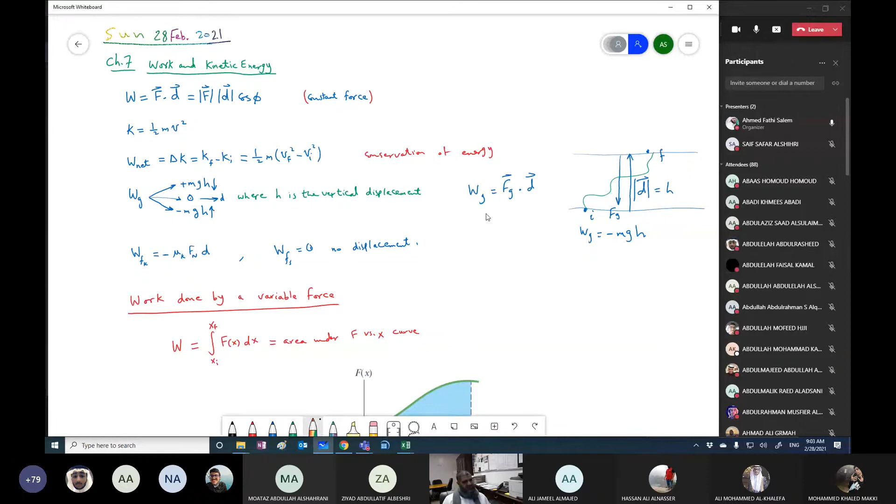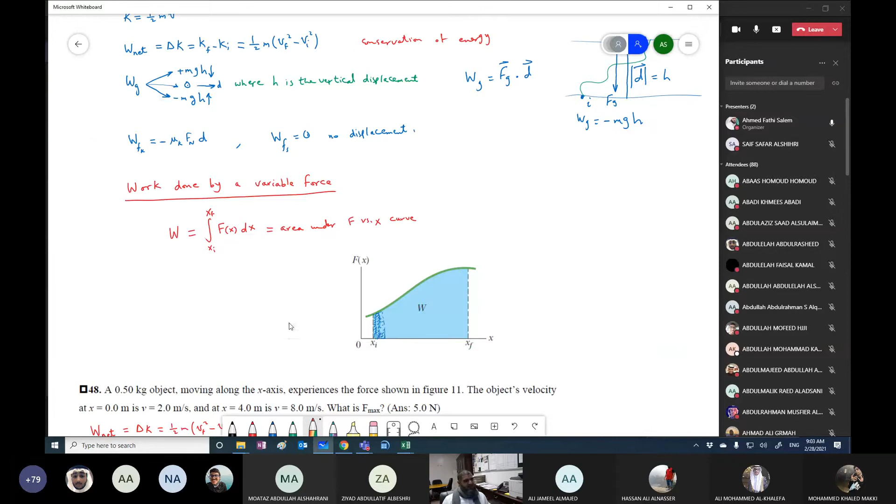Also, we started talking about the work done by a variable force. If the force is not constant, the force is changing, and we said that would be the integral from x initial to x final of f of x dx, and graphically this is equal to the area under the force versus x curve. We solved this example and we started discussing the work done by the spring force, and we said the spring force is not constant, but rather it varies, and it is given by Hooke's law, where Fs equals minus kx.

طبعا this minus sign makes trouble for many students, please be careful. This minus sign means that this force and this displacement are in opposite directions. So if the force, notice here, in this example, you are pulling the block to the right, so the displacement is to the right. The force of the spring will be to the left. The spring is pulling the block to the left.

Okay, now if you are pushing the block and compress it, the displacement will be leftward, and the spring will be pushing your object, so displacement will be to the left, force will be to the right. Up here, displacement is to the right, force of the spring will be to the left. خلاف يعني، هذا المعنى. واحد يمين هتلاقي التاني شمال. طب اللي كان يمين ده صار شمال، الفورس صارت ايش؟ صارت يمين. This is the meaning of the minus sign.

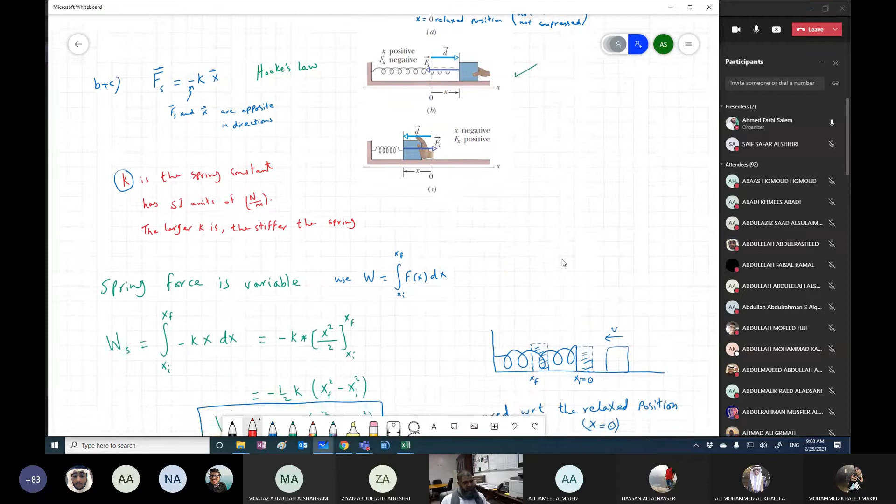This was a simple introduction about the force of the spring. But our goal is to know what is the work done by the spring force. Of course, the spring force is not fixed - it depends on how much you compress the spring. If the spring is not compressed, the force will be 0. If you extend it 1 centimeter, it will exert a force; 2 centimeters, more force; 3 centimeters, even more, and so on. So it is not a fixed or constant force - the spring force is variable.

So we will use the formula: work equals the integral from x initial to x final of F of x dx. The work done by the spring is the integral from x initial to x final of minus kx dx. This minus kx is Fs, the force of the spring. If you integrate, minus k comes out, and you integrate x, which gives x squared over 2, evaluated from x initial to x final. So this becomes 1/2 times minus k times x final squared minus x initial squared. We take the minus sign and put it inside the parentheses, and you get: work done by the spring equals 1/2 k times x initial squared minus x final squared.

Clear, the derivation? So x here, whether x initial or x final for the spring, is measured with respect to the relaxed position. The relaxed position of our spring is x equals 0. So this is our spring, and it is relaxed here - say this is relaxed. What do we mean by relaxed? It means equilibrium, meaning it is not compressed nor stretched - this is the natural length of the spring. If you press it a little more, this becomes some x; press more, it becomes a larger x.

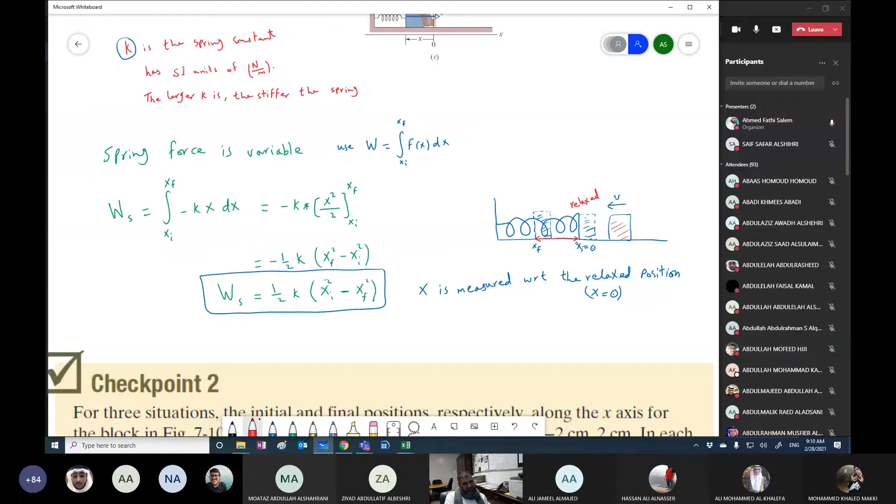Guys, keep this in mind like an earring in your ear: if the spring is relaxed, it means its x is equal to 0. Then finally, when the velocity of the object is 0, we will have x final. How much is x final? It is this distance from the relaxed position. So we measure x final with respect to the relaxed position.

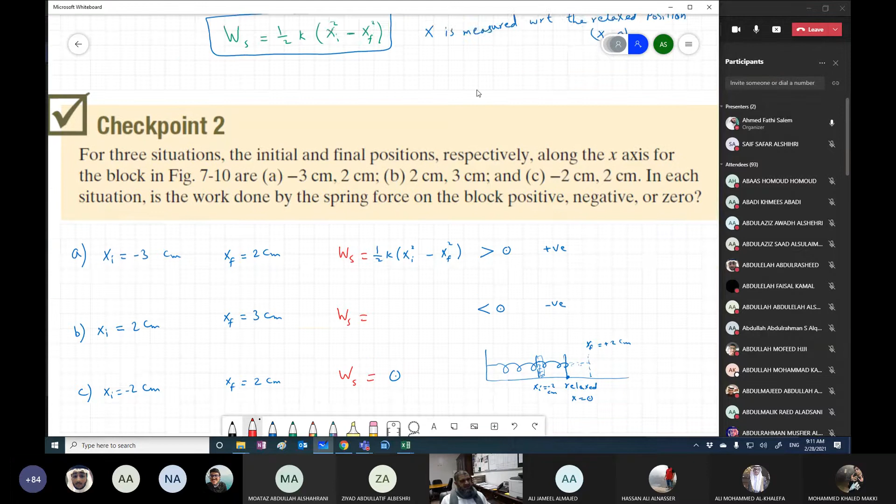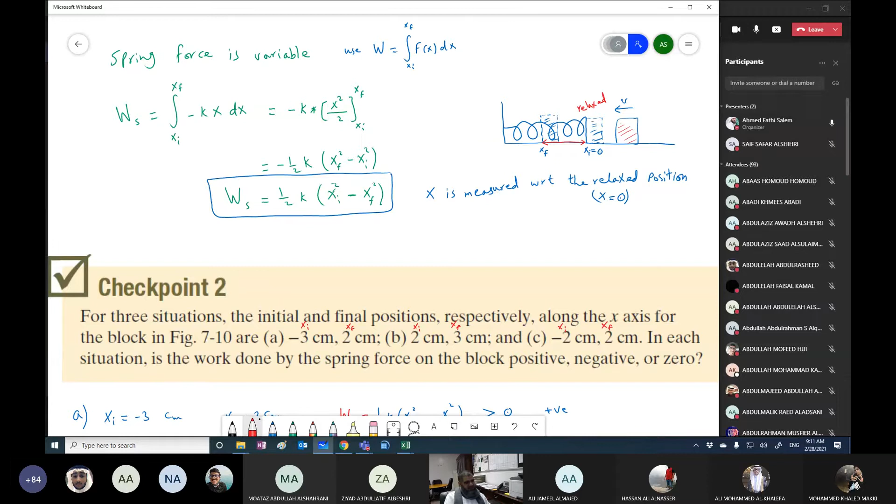Let's take a checkpoint question. For 3 situations, the initial and final positions respectively along the x-axis for the block in this figure that you're seeing are -3 and 2 centimeters - -3 is x initial, 2 is x final; this is x initial, x final; x initial, x final for each case. In each situation, is the work done by the spring force on the block positive, negative, or zero?

In the first case, x initial is -3, x final is 2. Work done by the spring is 1/2 k times x initial squared minus x final squared. This will be squared, giving positive, and this squared too, but we get 9 minus 4, which is greater than 0. That means the work done by the spring will be positive.

In the second case, initial is 2 centimeters, final is 3 centimeters. So work done by the spring will be 1/2 k times x initial squared minus x final squared, which is 2 squared minus 3 squared, so this will be negative work.

In the last case, you start with x equal -2 centimeters to x final 2 centimeters. So x initial is -2, x final is 2. When you square, this minus becomes positive, and this is also positive.

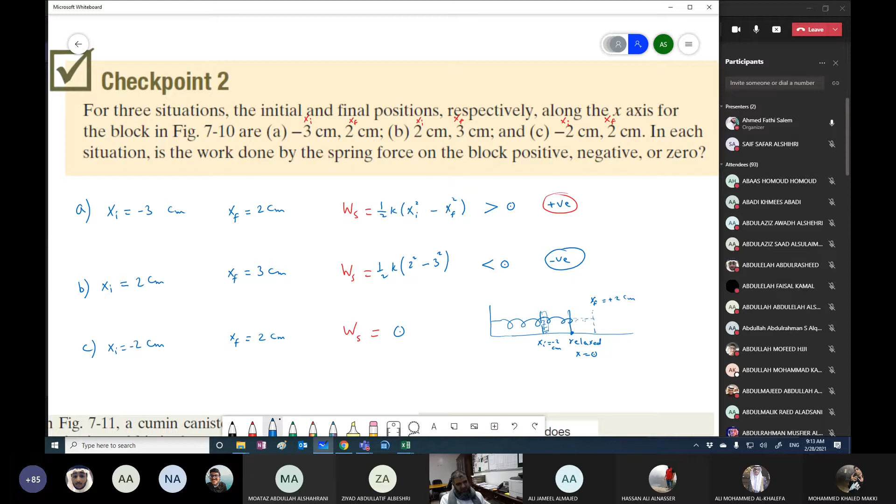So x initial squared minus x final squared will give you the work done by the spring equal to zero. How do we recognize this? This is the relaxed position, x equals 0. Initially it was compressed at x = -2 centimeters to the left of the relaxed position. Finally it is extended or stretched 2 centimeters to the right of the relaxed position. This is the meaning of x initial = -2 and x final = +2. Of course the relaxed position is somewhere in the middle between the two points.

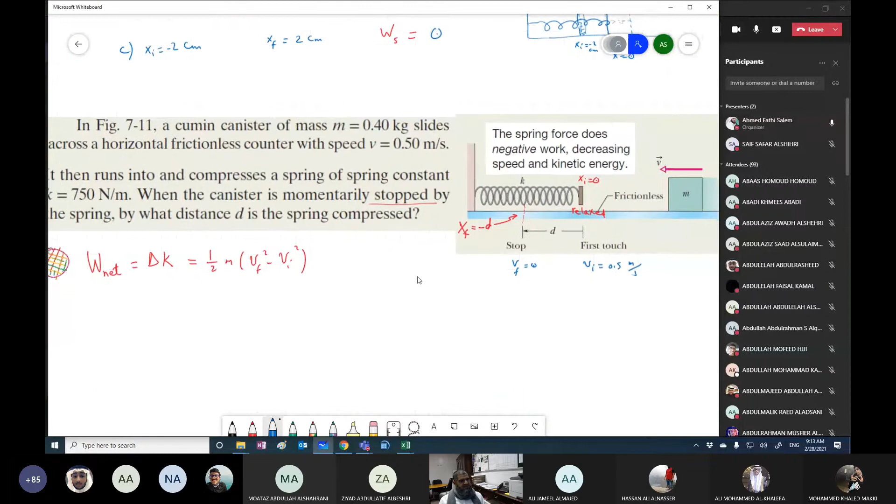Let us take this problem from the book. In the figure, a cumin canister of mass 0.4 kilogram slides across a horizontal frictionless surface with a speed of v equals 0.5 meter per second on this frictionless surface. So its speed will keep constant until it reaches this spring.

The spring initially is relaxed, in its natural position. It then runs into and compresses a spring of spring constant K equals 750 Newton per meter. When the canister is momentarily stopped, it will reach a stopping point here, so its speed will be equal to 0. What was its initial speed when it hits the spring? It was 0.5 meter per second. It will decrease until it reaches a point where v final will be equal to 0.

We are asked: by what distance d is the spring compressed? We want to know how much the spring will be compressed when this object is stopped.

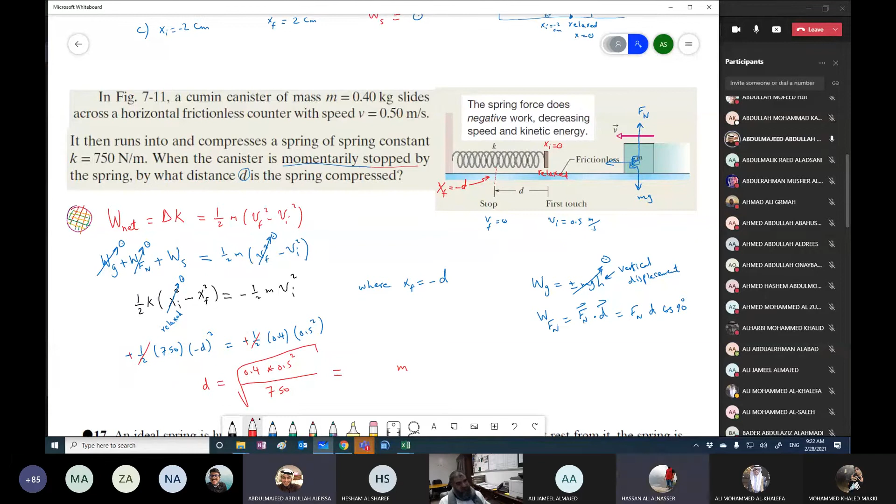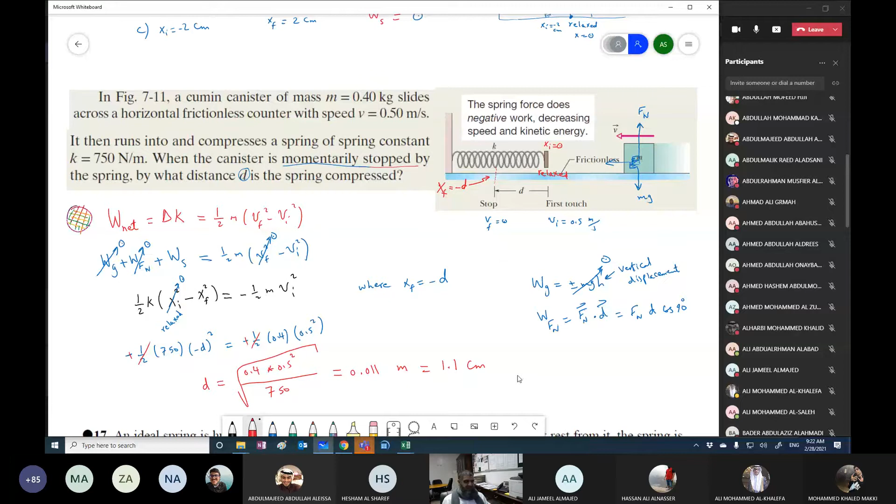0.01... 0.011 I guess. Yes, correct. Multiply by 100, this will be 1.1 centimeters. So the compression will be 1.1 centimeters necessary to stop this block while moving.

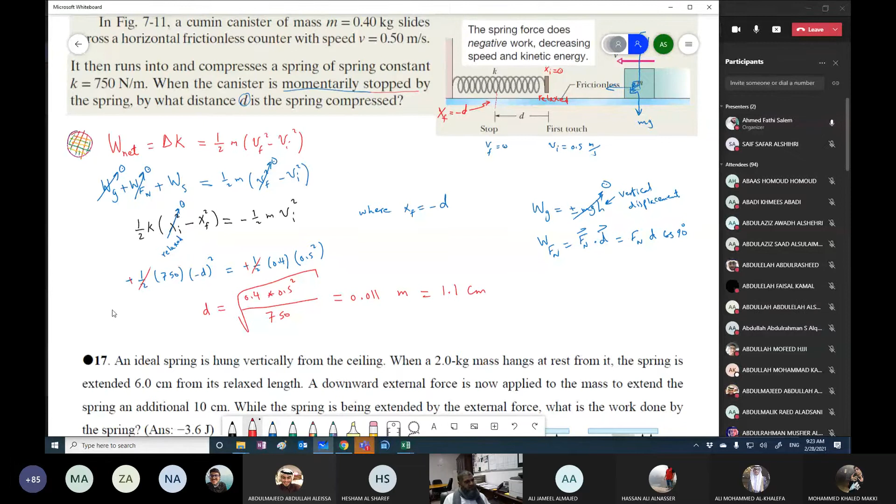Clear. Yes, thank you. Okay, let us take another example. Oh, this example is a very nice one. It's like a box of surprises. Let's tell the story first.

First of all, there was a spring. It was in the relaxed position, hanging from the ceiling like this. Since it's the relaxed position, this means this is x equals 0. It was sitting there calmly and relaxed.

Then we brought a mass m and hung it, attached it to this spring, and it will be hanging. The spring will extend by 6 centimeters - it underwent a stretch of 6 centimeters because of the weight of this mass. Imagining the situation? It will be in equilibrium, no motion - it will stop and settle.

So why is this mass in equilibrium? Why is it not moving? Why is it not falling downward? Even though mg is pulling it down, the spring is pulling it upward. So these two forces are equal. So we'll say that mg is equal to kx.

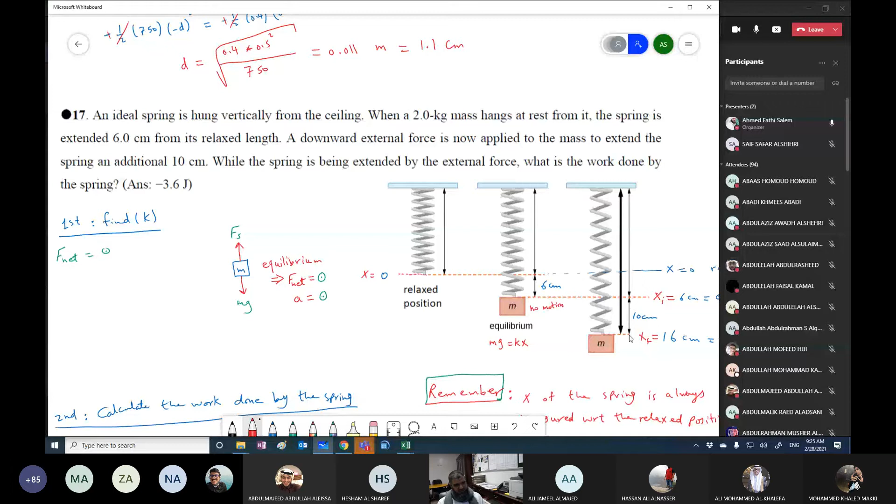After that, we intentionally pull the mass down 10 centimeters more - we deliberately came and pulled the mass with our hands, extra 10 centimeters downward, after it was settled at 6 centimeters. Now we pull it down 10 centimeters more, so X final is 16 centimeters of the spring. That's the story.

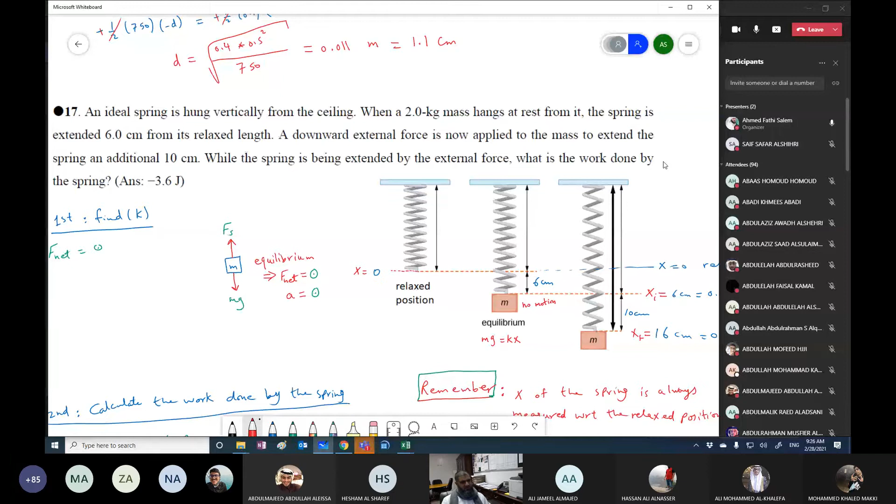So let us read the question. An ideal spring is hung vertically from the ceiling. When a 2 kilogram mass hangs at rest from it, the spring is extended 6 centimeters from its relaxed length. A downward external force is now applied to the mass to extend the spring an additional 10 centimeters. While the spring is being extended by the external force, what is the work done by the spring? We want to know how much work is done by the spring.

What did they give us regarding the spring's K? How can we calculate the K of the spring constant? We'll take it from this part: the mass is in equilibrium. There are two forces acting on it, Fs upward and the weight downward. F net equals 0 because the acceleration equals 0. So Fs is upward, mg is downward, and they equal 0.

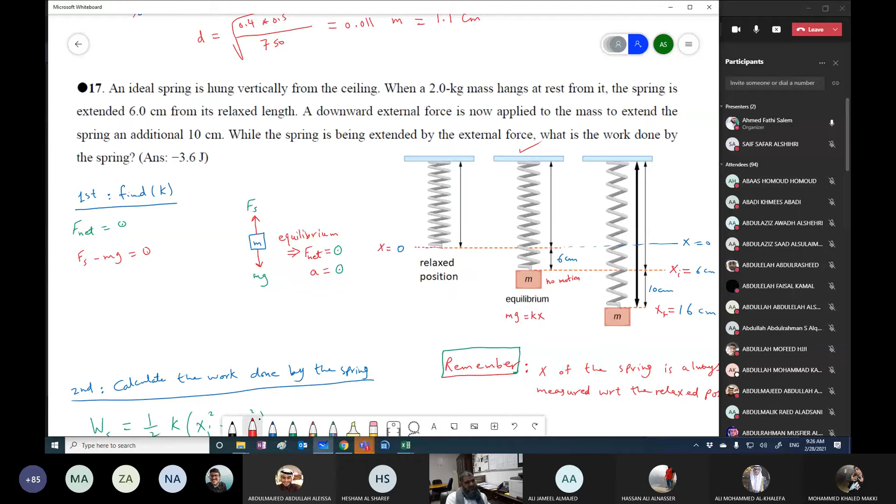How much is Fs? Here comes the warning I warned you about. Use Fs with its magnitude because the direction is already drawn upward, so anything upward we'll put as positive. So this is kx minus mg, take it to the other side, so this will equal mg. So k will be mg divided by x.

Let's substitute. How much is the mass? 2. How much is g? 9.8. How much is x here? Minus 6, or 6 in this case.

So the relaxed position was 0 and now it is extended by 6 centimeters. So what should I write here? X equals minus 6, which is 0.06. You have to put everything in SI units. Whoever said 6 centimeters is wrong, whoever said minus 6 is wrong, and whoever said minus 0.06 is also wrong.

We agreed that Fs equals minus kx. The minus sign was only to give you the direction of Fs. We drew the direction and found it upward, so now we put everything with magnitude only, so k equals mg over x.

Can you calculate it, accountant? 2 times 9.8 divided by 0.06. How much is this? 326.6, let's say 327 — forgive the rounding — Newtons per meter. This is K.

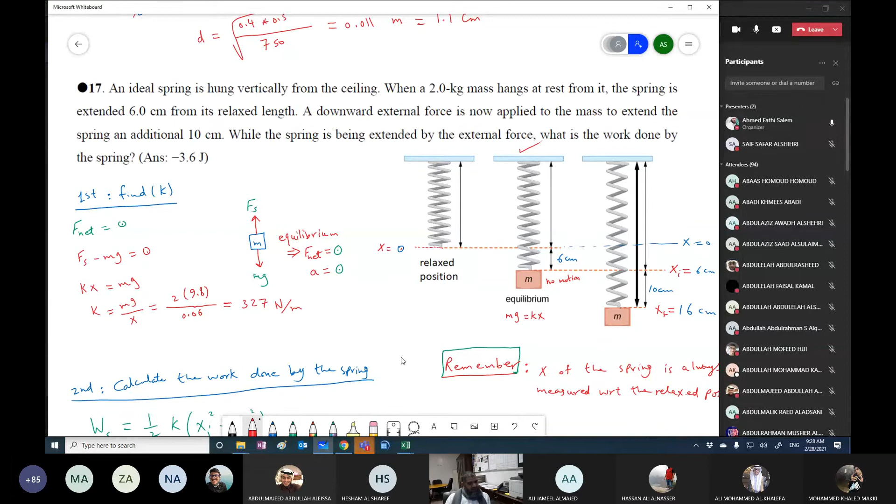Now we want to calculate the work done by the spring. Remember, X of the spring is always measured with respect to the relaxed position. This is a very important part.

How much is the work done by the spring? It is 1/2 K times X initial squared minus X final squared. What is X initial in this case? X initial is 6 centimeters because we stretched the spring by 6 centimeters from the relaxed position. So X initial is 6 centimeters and we extend it more by 10 centimeters. So how much is X final?

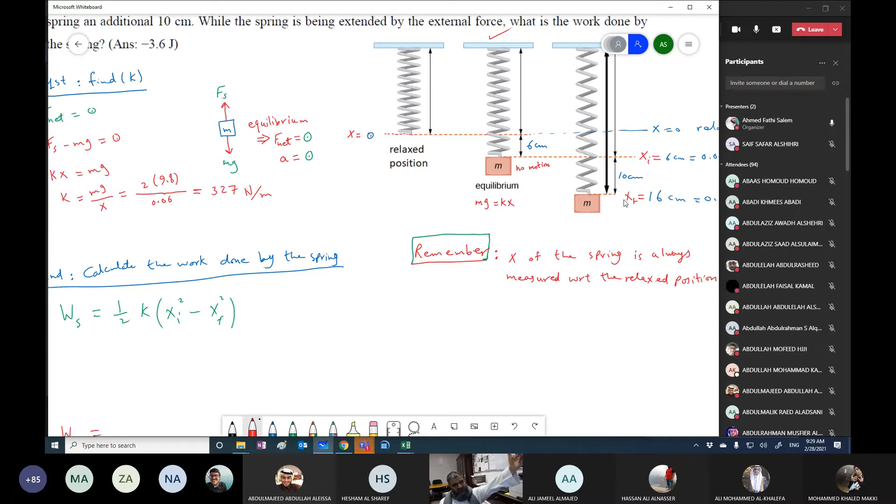Is it 10? 0.1? No, that's also wrong. It's 16 centimeters, because you are now measuring with respect to the relaxed position. This point is very important: it's true we moved it by 10 centimeters, but how far are you from the relaxed position? You are 16 centimeters from the relaxed position. So X final is 0.16.

Do you expect the work done by the spring in this case to be positive or negative? Negative. Why did you say negative? I think because X final is greater than X initial.

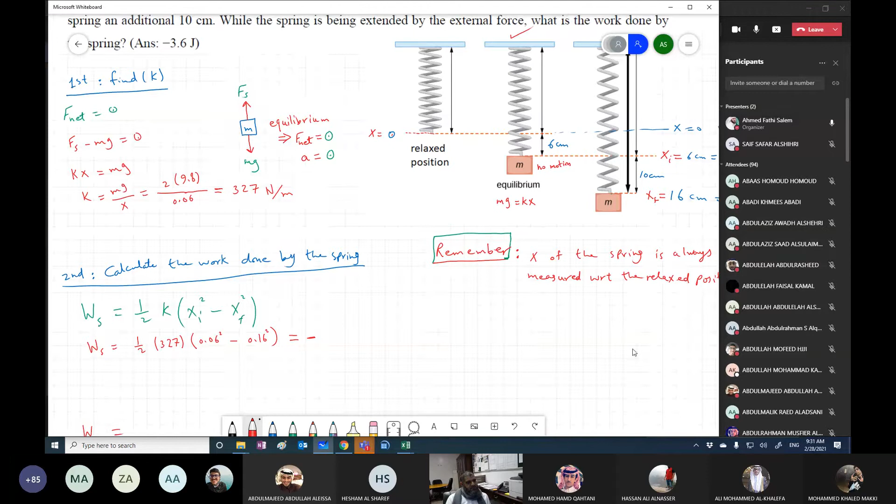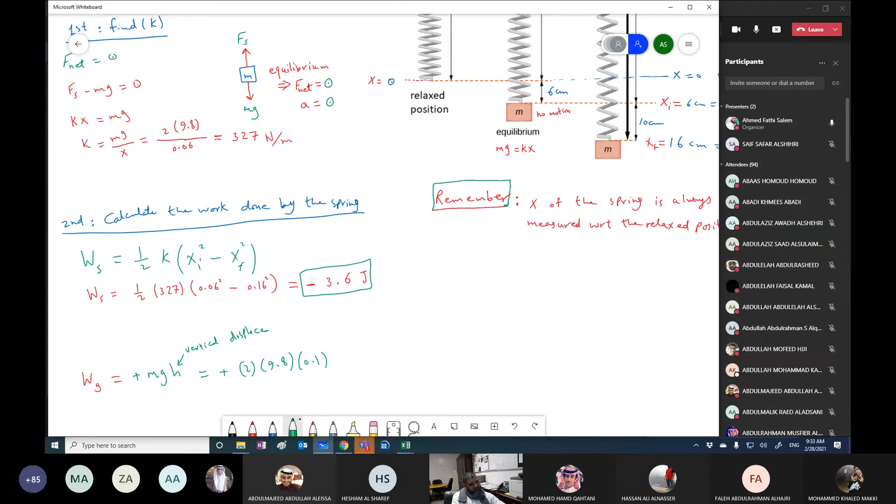فيرتيكال ديسبليسمنت، كم المسافة اللي مشيها؟ ملناش دعوة بالسبرينج. وضحت؟ So this will give us

Positive quantity of work. How much work is done by the force applied? لو قال لك واحد هو اللي سحب بقوة مقدارها مثلا 10 نيوتن، كم هيكون الورك done في تلك الحالة؟ الفورس is downward صحيح؟ This is force applied, and the displacement is downward. So this will be F applied مضروبة في displacement مضروبة في cosine 0. How much is cosine 0؟ 1. So this will be the force applied بالpositive مضروبة في displacement which is 0.1. طبعا لازم يكون مديك necessary information to find how much is the force applied.

الحمد لله. Are you all happy with this? أظن الموضوع سهل وبسيط، هيتضح أكثر when you solve more and more problems. إن شاء الله بعد شوي نحل مسائل.

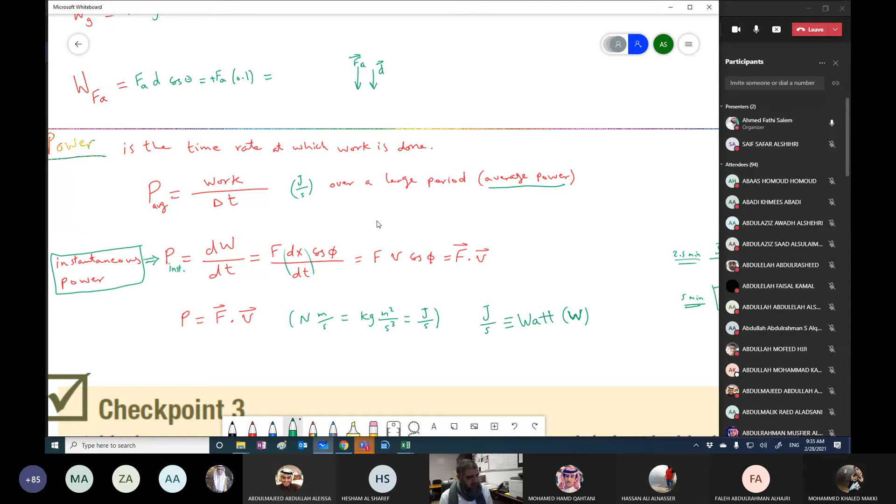Okay, last part here in this chapter is the power. الباور اللي هي القدرة، and it is the time rate at which work is done. معدل بذل الشغل، يعني how much work is done per unit time. هذا اللي بيعطينا الباور، يعني مقدار الشغل على الزمن.

لاحظوا يا شباب ان في حياتنا اليومية، we value more الباور ولا الورك في حياتنا اليومية؟ what do you think? الباور Power. I think الباور power. أهم، الباور أهم من الورك.

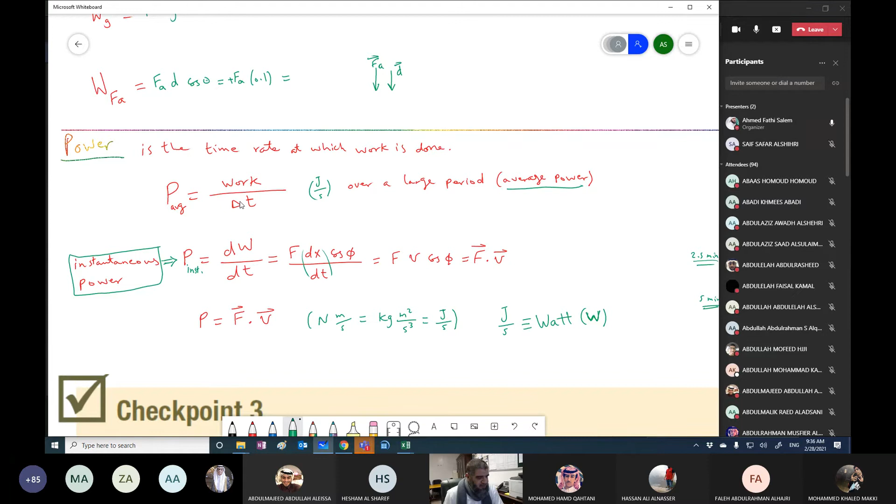خليني أعطي لك مثال. مثلا واحد دخلنا الاختبار، والاختبار الكويز مثلا 10 دقائق. في طلاب بيحل السؤالين في 10 minutes، وفي واحد تاني ما لحقش يحل، لكن بيقول لك لو أعطاني الدكتور ساعة كده هعرف أحل السؤالين. فالشغل هو نفسه، واحد حل السؤالين في 10 minutes، والثاني عايز يحل السؤالين في 1 hour. الwork is the same، both will do the same work. حل سؤالين حل سؤالين، لكن اللي هيفرق بينهم هو الزمن. doing the work in a shorter time هذا معناه more powerful، لأن الزمن في المقام. So smaller time will give you more power.

If you go and buy a heater، تروح تشتري سخانة الموية، بتلاقي في سخانة موية 1000 واط، اللي هي 1000 جول بير سكند، وفي عندك غلاية موية مثلا بتلاقيها 2700 أو 3000 واط. هذه غلاية موية وهذه غلاية موية. هل هذه هتغلي الموية حق الشاي وهذه هتغلي الموية حق الشاي؟ مظبوط. لكن what is the difference between them؟ The time it takes to boil the water. So this one will boil the water in short time, but this one will take 3 times as much. هذه تغلي الموية في دقيقة، هذه تاخذ معك 3 دقائق. Okay, so it is the same work but different power.

Okay, which one is more expensive, this one or that one? with a 3000 watt، هذه أغلى. Yes, second one, more expensive. So we pay money for more power. You get more grades, more marks for the power, حتى الفلوس كمان. عندك شغل مثلا في البيت، واحد قال لك اخلصه لك في يوم وواحد قال لك اخلصه لك في اسبوع، انت هتحب مين اكثر؟ اللي هقول لك يوم، صح؟ It is more powerful.

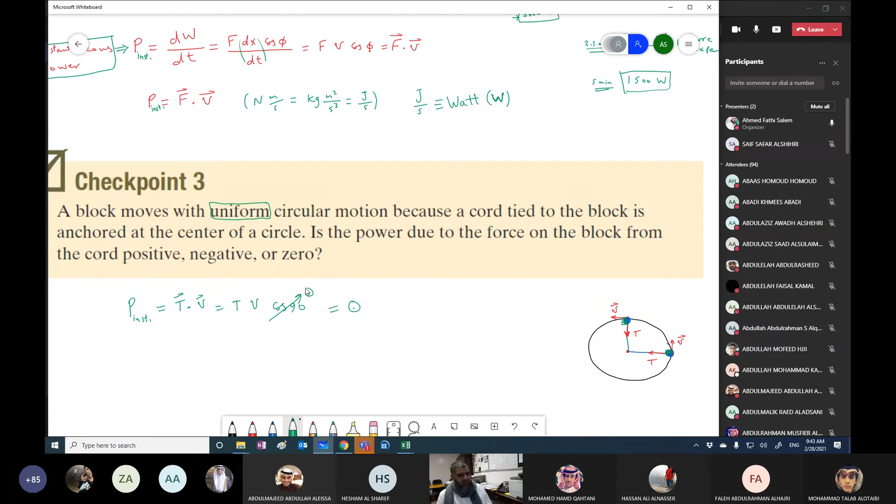طبعا واضح من سؤاله، he is asking about instantaneous power. How much is the instantaneous power? It will be force, which is the tension, dot product with the velocity. So this will be T multiplied by V multiplied by cosine 90. How much is cosine 90? This will be 0. The power will be 0. So the answer for this checkpoint, that the power exerted by the tension will be equal to 0.

طيب. Let us take more examples. So the speed is constant and it is 1.5 meter per second. معناها ايش يا شباب؟ ال V is constant. معناها how much is the acceleration in this horizontal direction؟ The acceleration is equal to 0. ليه؟ لأن ال V is constant.

معناها how much is F net؟ دكتور أيوه. ما نشوفك وأنت تكتب، ما تبقى معلق. معلق عندك أنت بس ولا عند بقية الناس؟ معلق. خلاص بسيط بسيط، ما تزعلوش نفسك ما تزعلوش. أهو في واحد قاعد في حتة فيها تفحيط. ها الآن ظهر؟

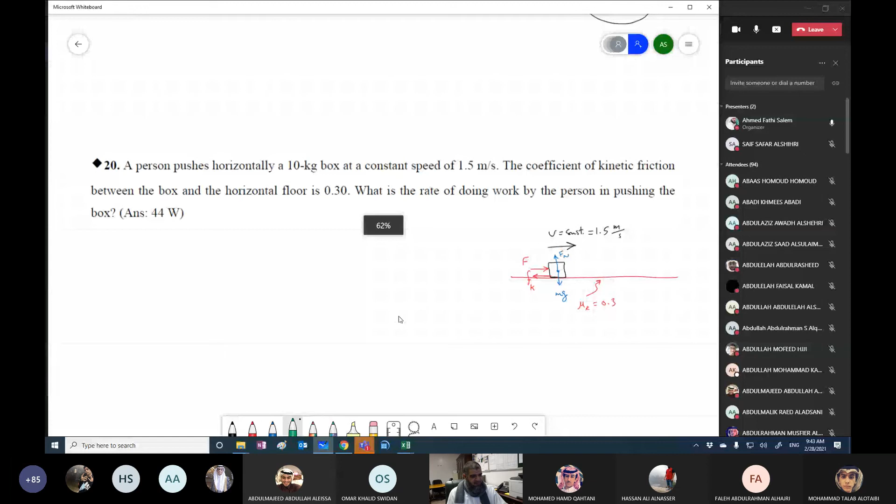لا للحين فريزنج، لا زالت الشاشة معلقة وفيها نسبة مكتوب 62% في النص، تكبير يعني. طب كده. الآن ما في شير سكرين أصلا. طيب لو عملنا كده، نعمل كده اهو، نقول بسم الله الرحمن الرحيم. Is it okay now؟ Profile picture only now، طب اصبروا عليه شوية. unshare، share desktop. شوفوا كده. ما تغير شيء دكتور، نفس لسه ما تغير شيء. طب خلينا للأسف الشديد، نطلع برا هو كاتب هنا في error.

Let's see what is this. Yes, try again. بسم الله الرحمن الرحيم، hopefully it will start now. ها، ظهر؟ لا يا دكتور الظاهر. كل التيمز يعني مو عندك بس؟ كل التيمز معلق؟ ايوه السكشن الماث عنده نفس المشكلة، عندي الآن عندهم مشكلة. حتى المات يا دكتور عندهم نفس الشيء من التيمز.